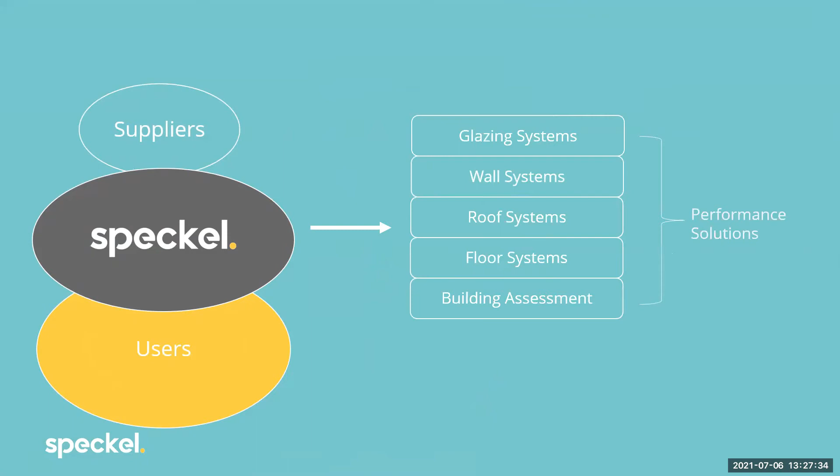But as we go through these, I've got to dive down into a little bit of detail because some folk are definitely going to have questions about this. In terms of glazing systems, what does the glazing application systems application do?

Well, it undertakes total system U values and solar heat gain coefficient values for the National Construction Code. It also does the applicable values for Volume 2. So for residential buildings, if you wanted to do a whole system glazing calculation, you wanted an option to use a process other than WERS, to use the actual size of the system. So it provides a more advanced approach.

In terms of wall systems, for anyone who's been looking at thermal bridging, you can jump on here and do thermal bridging calcs directly and quickly against the National Construction Code. A lot of this for your first projects is free, because we're about education and knowledge sharing. You can jump on, no cost, and also do condensation calculations against wall systems.

You can also do that for roof systems and floor systems. From a National Construction Code perspective, wall, roof and floor systems are really quite similar in terms of the standards you need to adopt to run the calculations. Where we see an opportunity to improve those, we do, such as running condensation calcs on the fly. So all the wall, roof and floor calcs run condensation assessments on the fly.

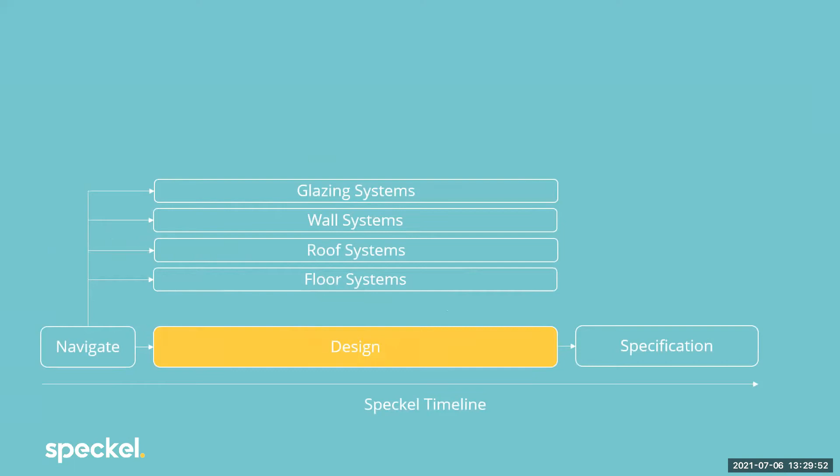We've been doing some really interesting stuff. Just to give you a feel for the timeline of how someone may be using Speckel: people use it to navigate and ask questions of the National Construction Code, then they jump in and use one of our apps, whether it's a glazing system or a floor system, to design in that space. Up until now, what they've been doing is using that information within the glazing, wall, roof and floor systems to feed into a whole building assessment.

Now that we've developed our building assessment, and we're just about to release the full simulation app on the market tomorrow, we're finding people are starting to use that before they do the glazing, wall, roof and floor systems, because it makes more sense to specify those against the building assessment.

So it's a space that's growing. If you jump onto the platform tomorrow morning, you'll be able to freely get access to full building simulations against the National Construction Code. This is a first for the industry, and we really want to encourage better, faster adoption of this approach, which we think is much better.

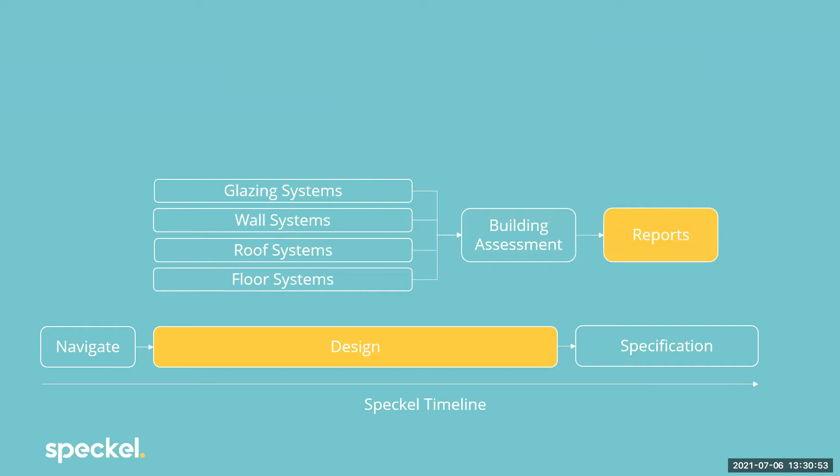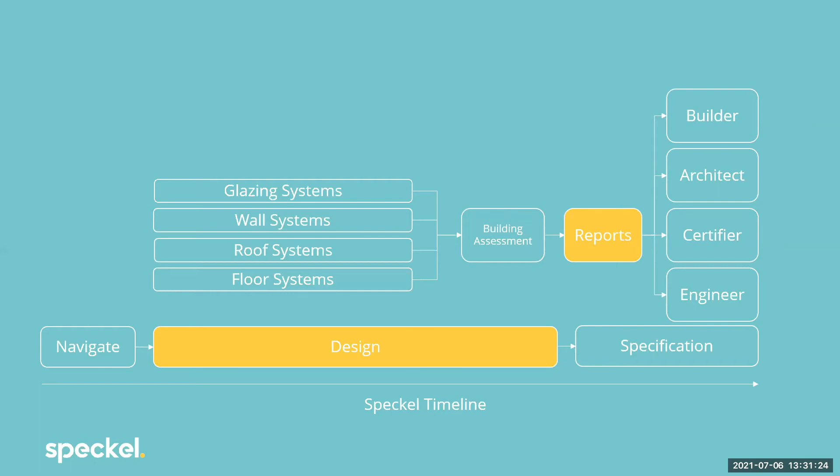But whatever you're doing, you're producing reports. Reports are always the outcome from Speckel, and those reports are performance solutions against the National Construction Code. They might be used by a builder, architect, certifier, engineer or designer primarily to meet specification requirements. This is the big bit: we grab all that data from the suppliers, do the calculations, and create a really quick platform to do it.

I don't have that much time, I've got about 10 minutes left. So I decided today I was just going to focus on two applications, the wall systems and the building assessment, because this will give you the best flavor of where we've got to in this project.

Before I do, I want to cover something critical that we get asked all the time: in terms of the National Construction Code, where do you guys actually sit? Are you a deemed-to-satisfy provision, or a performance solution? Because you're going to be pretty much one of the two. We pretty much sit like this: everything we do is a performance solution against the National Construction Code.

For some that are doing the deemed-to-satisfy stuff with J1.3, J1.5 and J1.6 - that's for your roofs, walls and floors respectively - effectively once you jump on here, because you're doing a more advanced version of a deemed-to-satisfy, you're doing a performance solution, and then you produce a report against the performance requirements of the National Construction Code.

In this recent version of the building assessment that we're putting out on the market tomorrow - great timing for you guys - we do JV3 assessments, for thermal and occupant comfort. So really, all of these applications go through that pathway in order to meet the requirements of the National Construction Code.

Now, in terms of wall systems, I've thrown in a couple of quick little videos here. I'm just going to start that one off and see if I can pause it for a second.

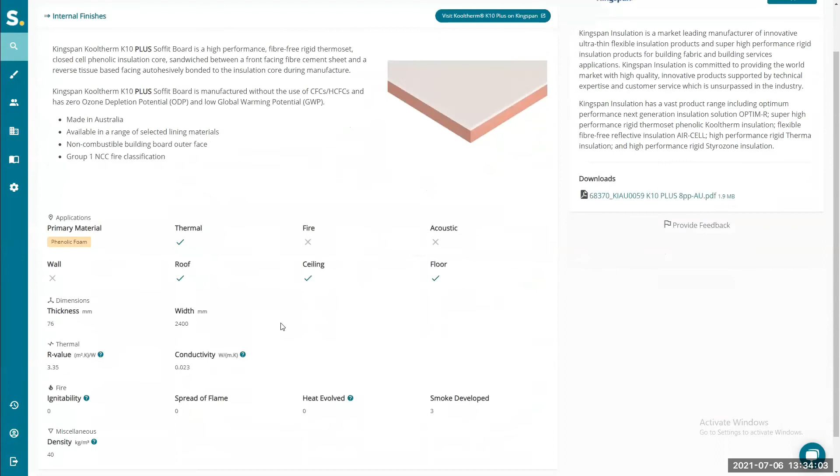So I think there's one third example, Kingspan, was it? There you go, so a bunch of Kingspan products. Those insulation products, again, are all available. So I think you get the gist - it's a very quick and easy way to get access to information. And those suppliers, again, they've been fairly critical in making Speckel a reality.

Now, when it comes to the templates, this is what a template is. So if you jump on and you grab a supplier again, see those there? I'm just going to stop that for a second.

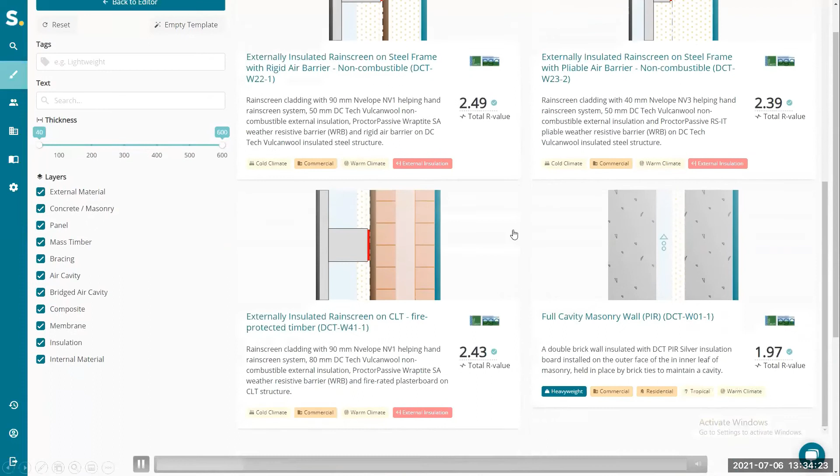These here are templates. So these templates are wall build-ups, a bit like the CSR Redbook, for example, that are really predetermined by us with the supplier, where you can simply click and specify those systems against the National Construction Code. So over here, you can see it has a title, it has a description, and it has a performance value.

And you can go ahead and just - oh, excuse me, I'm just going to go back to that. Sorry about that, guys, my video is not working. There we go, let's play that again.

So you go ahead and just click, select your template. There's lots of them on there, I think 200 odd. And there you go, you can see that you can get a number very quickly.

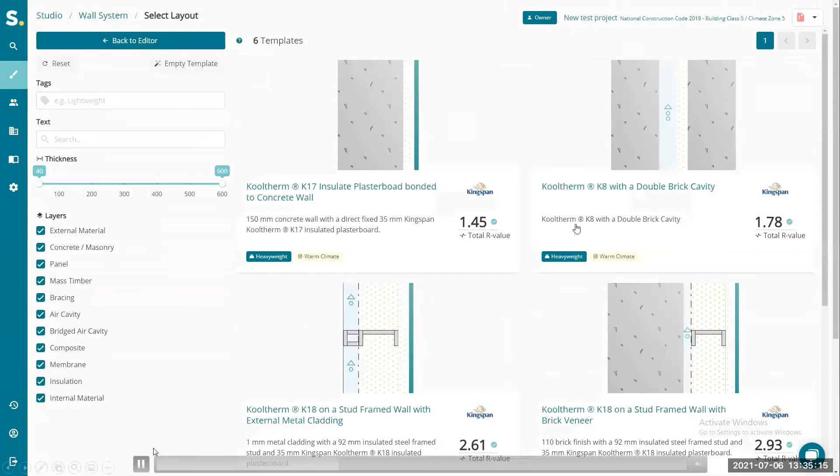I'm just going to pause this the next time we select it. I'm going to pause it there. And what you can see here is that you have a wall buildup - so a concrete wall with an air gap, a bit of framing. Of course, you can look at the thermal bridging stuff here.

And then you've got a Kingspan Kooltherm K18 product on the inside, and then it nominates its total R value. So you can go in here and just change any of these - change the thickness of your concrete wall, change your K18 to a different thickness, for example, and you'll get a resultant change in the performance of the system. And you can go ahead and look at condensation and temperature factors and those types of things too.

Alas, I don't have that much time, so I'm going to go on to another example of what we've been doing, and this is the JV3 modeling space. So JV3 modeling, for those that are not across it, is really a process whereby you can model designs against the National Construction Code in order to make sure that your design with your proposed building fabric is better than the DTS provisions.

That's effectively it, so I'll say that one more time. You model a couple of designs. You're really focused on the building fabric being better than the deemed-to-satisfy provisions of the National Construction Code. So if I was to articulate this in a slightly different way, what we're doing in the JV3 space is we're using a performance solution in order to look at glazing systems, roof systems, wall systems, and floor systems to effectively trade off to meet the National Construction Code requirements.

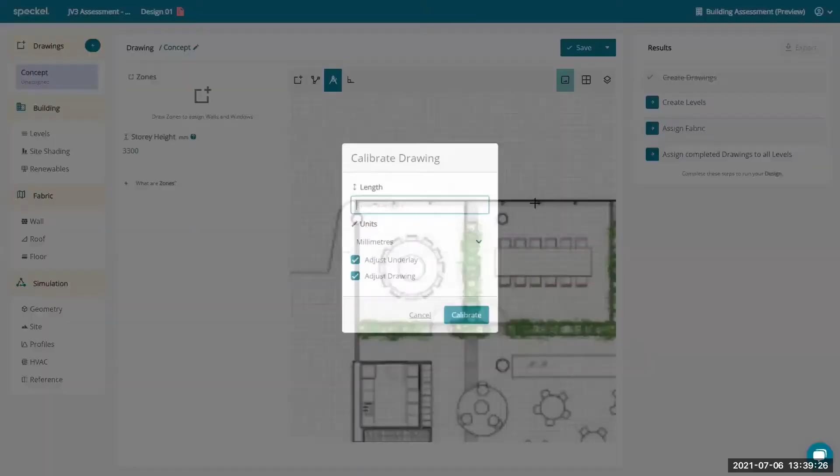This is just going through a quick little process. So I know the width of that window there, so I can go ahead and specify that. I think it was 1200 or something like that. There you go. Yeah, so that's going to help you calibrate that model.

And then we can go ahead and set the origin of this modeling space in order for this modeling space to understand where the levels are within the building. This video is slightly old now, but I think you get the idea. You go ahead and start really designing up your building.

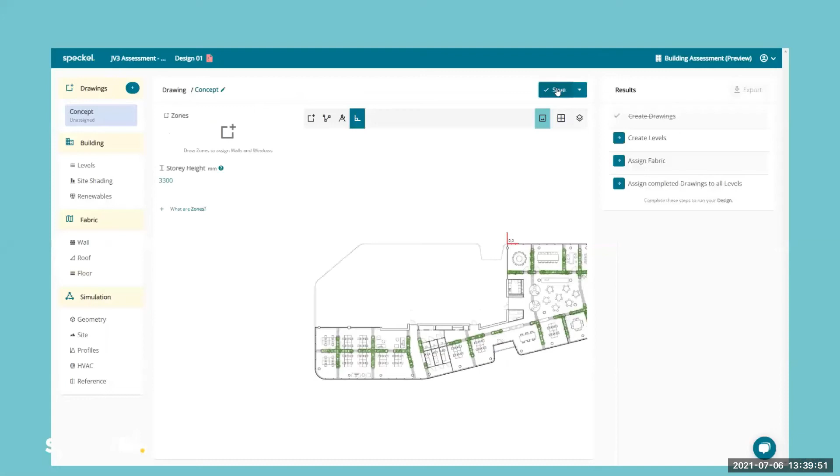And as you go through the process, you can then start drawing zones. So these are just thermal zones. As you go through that, you really start to build out a representation of the building and undertake some administration along the way, giving those zones some spaces. It's a very, very simple approach, but it's highly effective.

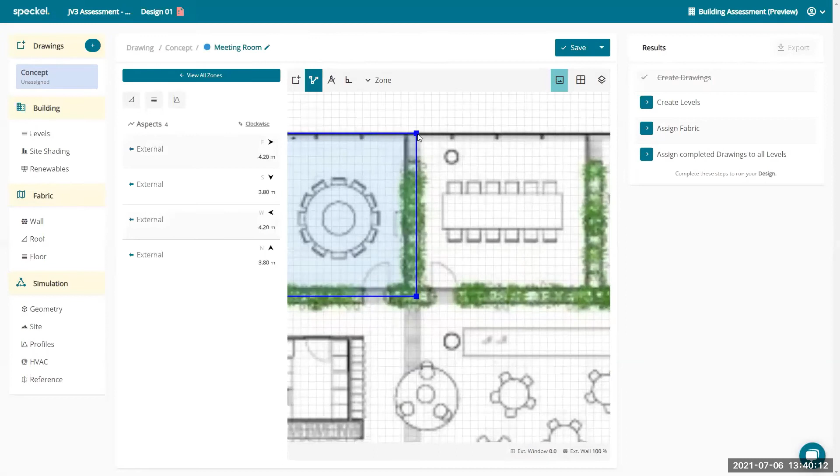And what we do, we collect all this information and we throw this off to Energy Plus in the cloud. So all the modeling is done probably 10 times faster than what you'll do even on a really high performance computer. So it's a very, very speedy approach to how we design buildings.

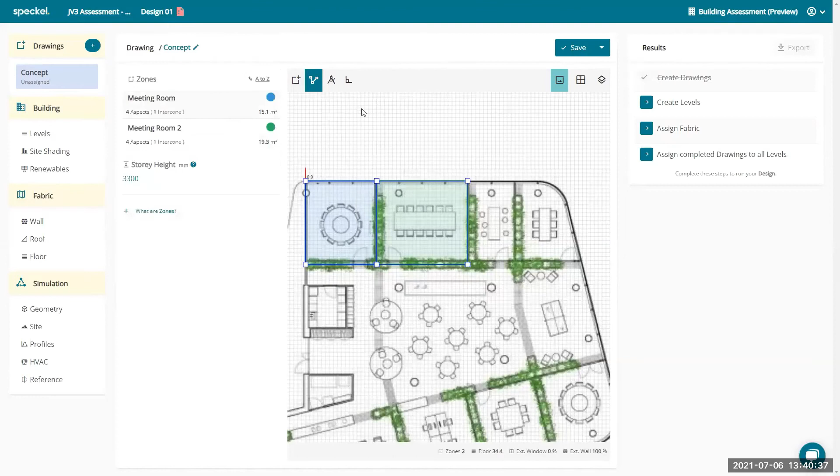This little example is just showing that you can nominate different types of zones and that type of thing. So I'm just going to push that along to the next example where you can start to see where I've filled out all these zones.

Once you've done that, you can add all of this information to levels. Now in this example, I believe I threw in 3 levels. That's right, yeah, and we've only brought in 1 drawing. So what we're going to do is just give those levels a quick naming. This is probably about halfway through this example.

I realize I'm about 20 minutes now. I'll probably be a bit more time sensitive with the rest of these examples, but you get the gist, and you've got plenty of time. We've still got 20 minutes up our sleeves. There's a few coming in, but don't use up all the 20 minutes, save some time. No, that's fine, that's fine. Another 5 or 10 would be lovely. No, awesome, good, thank you very much.

Okay, so cool, so there you go. So the levels are in at this point. So you start to stack levels in, stack drawings.

And then you can look at the building fabric, right? So the building fabric is obviously fundamental to the performance of the building. And here we provided a very quick, easy way to literally click one button, so you assign all your building fabric to the National Construction Code. And that's it. There's advanced options there, of course, if you want to really look into this stuff, but you don't need to.

You can go ahead and save that and do the same for your roof and floor systems. Just assign the fabrics related to the National Construction Code and the climate zone and building type you're within, because we've automated all of that for you. It's a very quick and easy process, even if you're unfamiliar with this general modeling process.

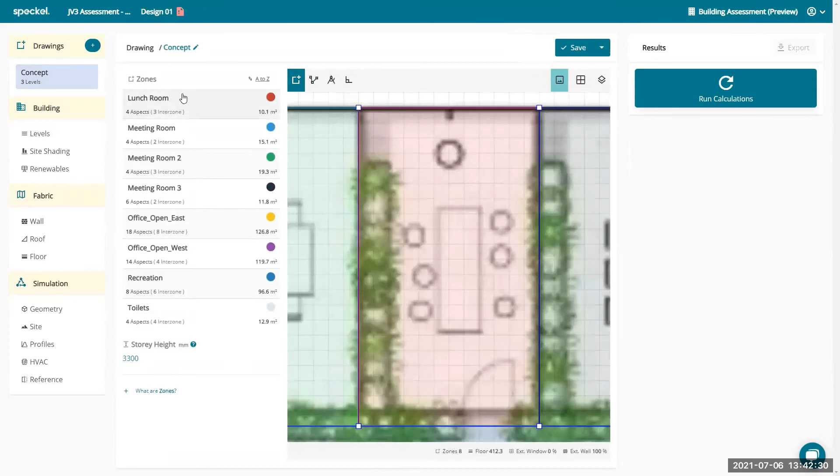At that point, if you accept all the other defaults, you could go ahead and run the calcs. But you might want to look at a bit more detail at the zone level. Let me stop for a second, as this might be going a bit fast. The transition from selecting the building envelope for your whole building and then going into the zone level to nominate a different wall type, for example, is what this area is aiming to look at now.

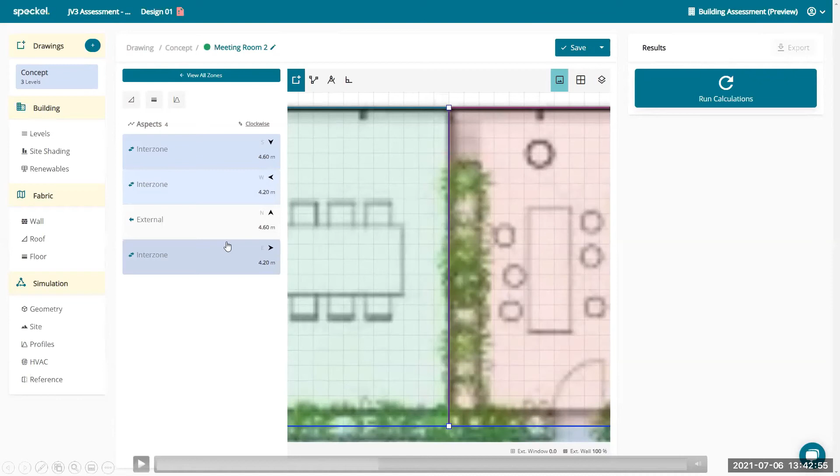What you can do is go in here, select that external wall, and then add your glazing. All you do is select your system U value and solar heat gain coefficient. I'm sure a lot of you are across these performance values for glazing, and then just nominate where that goes. I think we've got a couple of nominations in here.

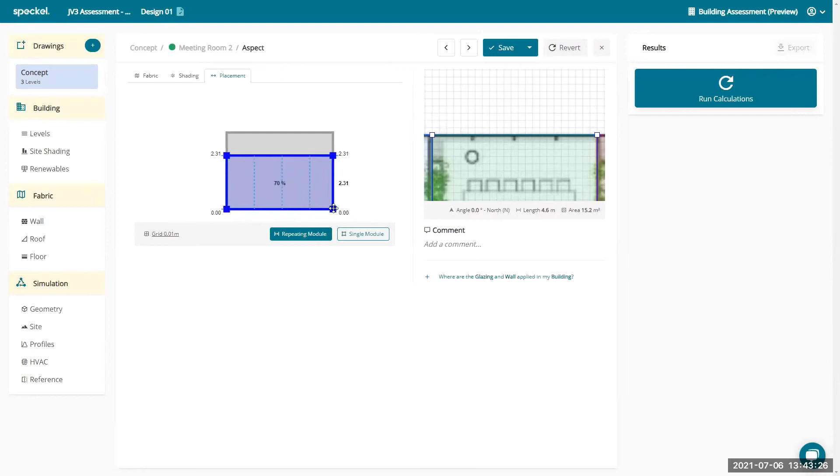You can do just a single module, so place that anywhere within that aspect, along that wall there, or do a repeating module, a bit like a curtain wall or glazing that's repeated across the design. You can go ahead and save that, and distribute that across the whole design if you want.

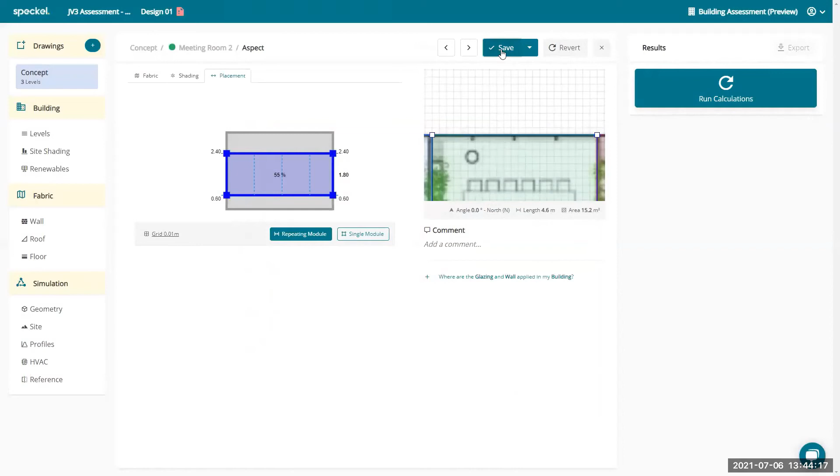In this example, I've gone ahead and started to select as many external walls as I could find. This is going through all the individual zones and selecting external walls, and then I'm going to put glazing across all these external walls in order for it to be distributed. So if you had a plan like the one we were just looking at, and you wanted to put 55% window to wall ratio across the whole thing, you can do so as quickly as that. I'm just going to update those 19 aspects, and then that gets saved and pushed through to all the glazing on the project.

So pretty much the perimeter that you can see there now has 55% glazing across the whole thing, with a system U value of 3.2 and a solar heat gain coefficient of 0.3. It's as quick and easy as that.

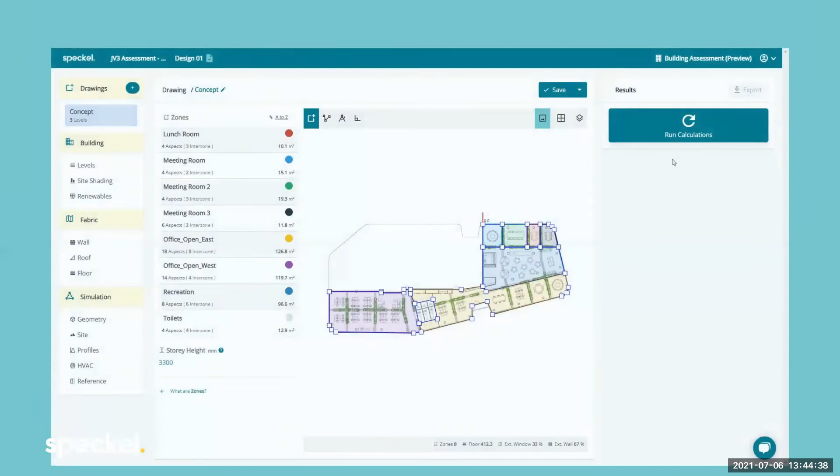Next up, we're looking at profiles. The profiles are adopted here in this space, and you can go ahead and select and create profiles if you like. These are of course all for Volume 1. You go ahead, select a profile, select whichever one you want, and go from there. You can rename your profiles as you like. This is probably a bit of a deep dive for this presentation.

Once you've done so, you can go through and start looking at the amount of people in the space. You can either accept the defaults or tweak those. You can look at the activity of the people in the space - these are thermal comfort considerations - and then look at lighting, and equipment. Don't worry about those fractions there, they're not there anymore, that was in a test mode. Then look at infiltration, so the leakage of the building in terms of air, and look at set points. You can go through and set these for all zones within the building.

And finally, HVAC. For those that are across HVAC, you can go ahead and start putting in a couple of different systems there - we're building those out over this next month. But once you do, you can set the parameters for HVAC accordingly, including ventilation supply for the space, and then go through and run some results.

I'm not going to go into the results now, as I didn't have time for that. But your results are effectively comparing the reference building against the proposed building in a JV3 process. It's worth saying to this cohort of people that we do this for verification modeling too, so we do this for both Volume 1 and Volume 2.

We focused on volume 1 for the time being because we see 2019 and the National Construction Code as a conduit for better buildings. 2016 is not necessarily that, because it allows you to get away with murder in terms of the performance of your building fabric. We are developing versions for 2016 that you can also use, but the fabric will probably be less flexible in the reference building, because we don't condone NCC 2016 as a pathway to better buildings.

But there's lots of results, don't have time for those. If you're wondering what that building looked like, that's what it looked like. You can, of course, export the results - the DWG file or the DXF file and the IDF file from Energy Plus.

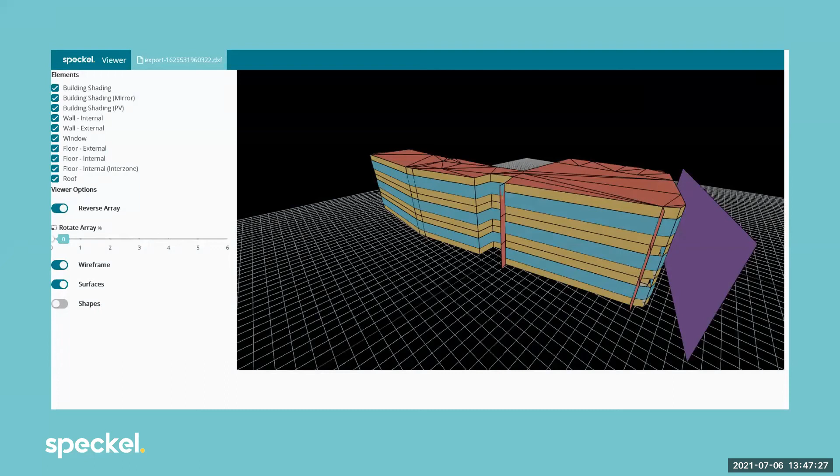You'll be able to export the actual Excel file and an automated report against National Construction Code requirements very, very soon. We've tested, we're continuing to test. It's critical for us, and for you guys to know, that we are testing against the requirements of the National Construction Code.

Just as a point of interest, we've been testing both in the calculation space, but also against industry practice. We've worked with about 12 consultancies at this point, looking at the efficiency that Speckel now represents in terms of building assessment. If you see along the horizontal axis, we've got the number of thermal zones.

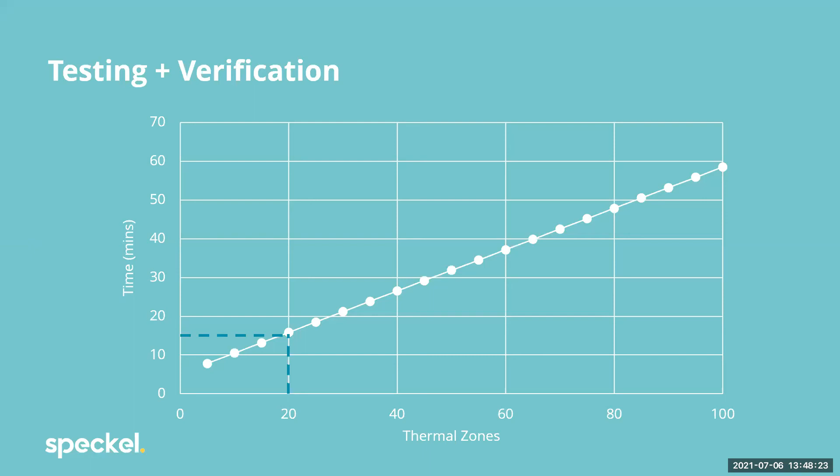And running up the left is the time in minutes. What we're finding is that about 20 thermal zones in your project takes about 15 minutes to model in Speckel. 45 zones, about 30 minutes. 80 thermal zones, which is a big building, less than 50 minutes. So the full building simulation modeling in Speckel, from start to finish, is less than an hour for about 80% of projects.

It's extremely fast and is a bit of a game changer in terms of what it represents for the market.

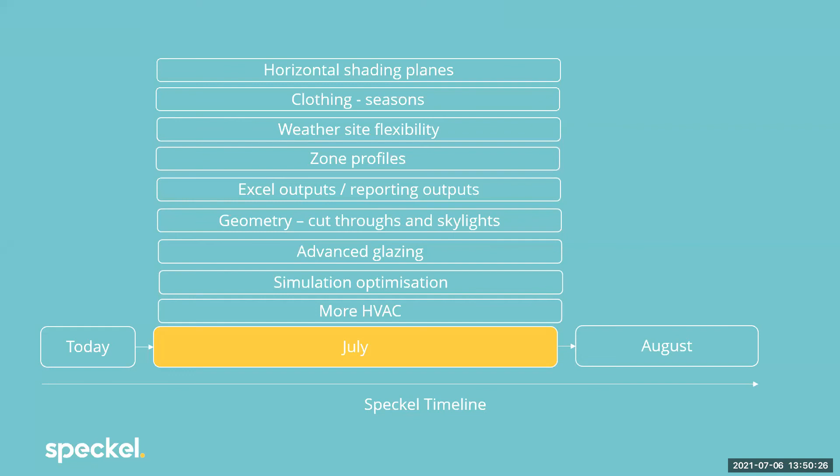As we get into August, the 2019 volume 2, the resi stuff, and the 2016 volume 1 will all kick in. So by September, it will be really well rounded in terms of running building simulations for 2016 commercial, 2019 commercial and residential. At this point, that's what we've got time to do.